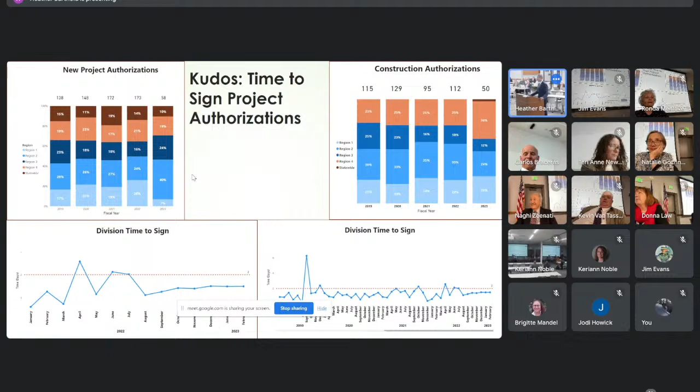That's all I have for you. Do you have any questions for me on anything? All right, yes, no — thank you.

Thank you. Other than — I think the 2-day thing is kind of remarkable, and the fact that we come in under that is extra remarkable. Yeah, it's great. I think it helps too that we do a lot of things electronically now. When I was doing this, it was all paper — we'd get a delivery from the state, a stack, and we had to go through it and get back to them. Electronic systems really do help expedite things. UDOT has given us access to all of this so we can get in, check what we need to do, and take action real quickly. That really makes a difference. Thank you.

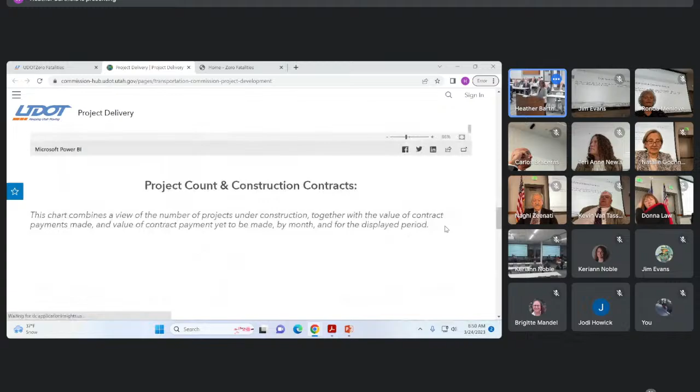Now looking at our construction contracts. Right now, in March, we have 170 projects in active construction. Contracts paid out are almost $1.2 billion in contracts paid, and you can see the remaining amount that we have on open contracts is about $600 million. Again, this is pretty typical for us at this time of year.

Moving down into the contractor payments, again, you can see the trends that we have. We were a little low in February, but I think everybody recognizes the challenges we've had with doing construction this winter, so it really aligns with where we're at, and it picked up a little bit. We'll continue to monitor that, but it's pretty standard for the way we do business.

Now moving on to the contract award and engineer's estimate. You can see the blue is the engineer's estimate, and the green is the original contract amount. We had asked everybody on project teams to go back and reevaluate their cost estimates because of inflation. We ended up estimating a little high because prices did start to come down, so we were actually getting really good bids, and you can see that with what we had in the green.

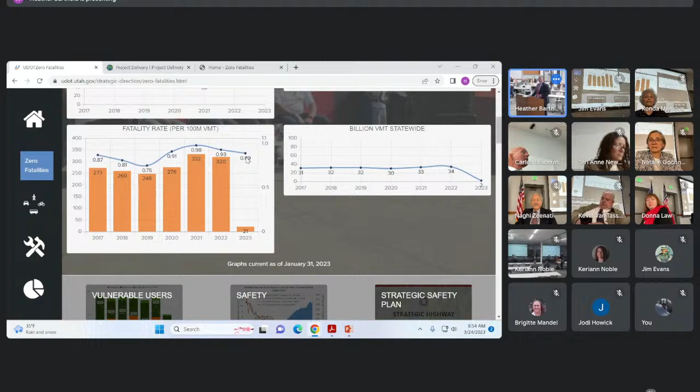Looking at a snapshot where we are today, we have had 51 fatalities this year. I talked about this target where we try to reduce based on a 2.5% reduction over the last 3 years, and right now we're trending below that, which is the first time I've been able to report that since I've been in this position. So keep our fingers crossed that that continues.

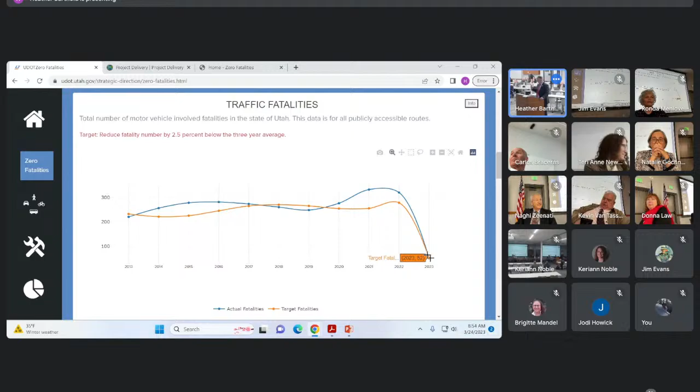Let me jump over here to the zero fatalities page and show you a little quick report card. If you looked at where we were last year at this time, we were at 63 fatalities, and as a comparison to today, we're at 51.

The other thing that was interesting is the number of crashes compared last year to this year. I'd attribute that a lot to the weather we've had, which we got to see this morning. So we do see more crashes of less than fatals, and I've attributed a lot to weather.

But I'd like to take a few minutes now and take some of this data that we received from 2022 and show you some of the information that we put together to analyze and look at.

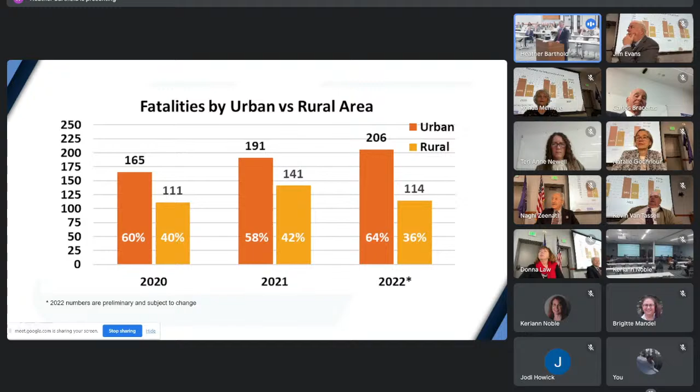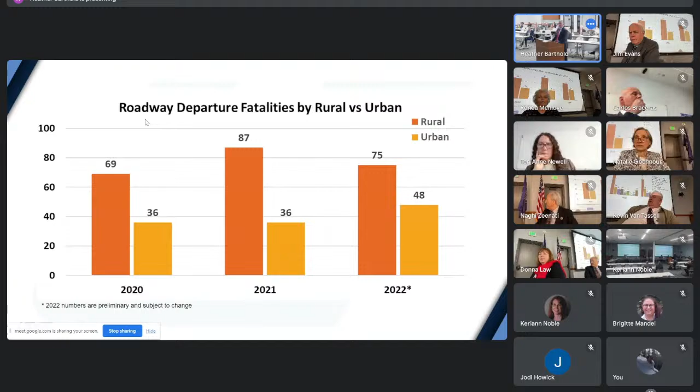We do a survey to determine how many Utahns are buckled up. Last year we were at 92%. If you look at the unrestrained and take out bicyclists, pedestrians, and motorcyclists, about 43% of the fatalities were unrestrained. That's 8% of our citizenry representing that high of a percentage.

Helping educate on wearing your seatbelts continues to be important. It seems obvious, we shouldn't have to talk about it, but we still have to. I do that in my own family, but I'll keep working on it.

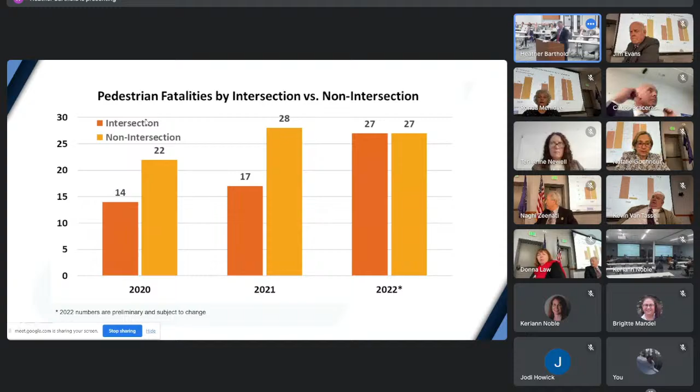Is that because at the non-intersection, this is people jaywalking, cutting across, or we have no access? How is that determined? That is jaywalking, and there's other distracted drivers not paying attention when they leave the roadway as well.

Remember, roadway departures is one of our items, so those two items play together. You couldn't put your finger and say it's just from jaywalkers, and it's not just because of lighting. There's a lot of issues when it comes to pedestrians getting hit.

This would also include if somebody broke down on the highway or interstate and got out of their car and got hit, it would be shown in this area. That is a concern, and that's one of the things we're working on, trying to find more solutions. We talked a little bit yesterday about HAWK signals or mid-block type crossings, so those are some things we're trying to work on installing more often when the criteria is met.

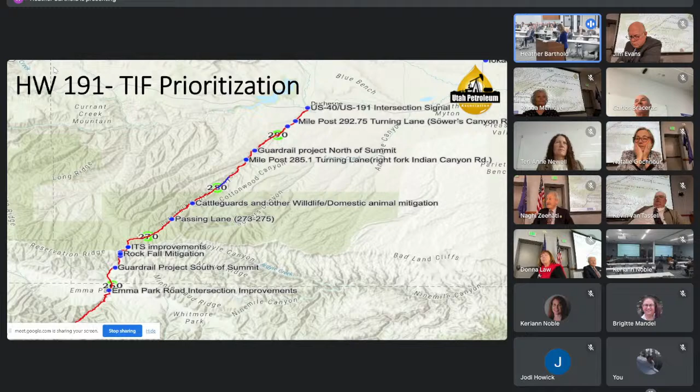I wanted to give a brief update on where we are with US 191, the traffic volumes and the needs out there. I had the opportunity to listen to a bit of your workshop yesterday, and some of the clarification around whether the 88.5 million was or was not funded. I will assure you that yes, as Leif explained, the legislature did provide the full 88.5 million requested, and it's not a coincidence that it exactly matches the UDOT study that supported it. We were very clear in articulating that in the funding request. So if we can move to the next slide.

Today we are exporting about 60,000 barrels a day, all via US 191 down to Price and Helper to the rail terminal. That's about 10,000 more barrels a day than the last time I had the opportunity to see you all, and that's actually ahead of our growth projection. So I wanted to give an update that we are continuing to grow, and we're expanding more rapidly than what we had put into that growth projection to you all.

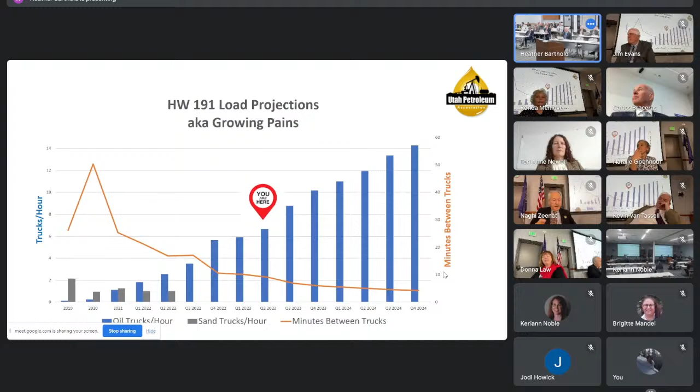I don't know if anyone else came in that wanted to make public comment. Those that came late in the UDOT family, Jim, let's start with you — introduce yourself for the record. For the record, Jim Evans, live in Utah County, Region 3. Great to be here today, sorry once again for my delay. You leave early and get here late. And those of the UDOT family who came late, just introduce yourselves. I'm Rob Clayton, Region 3 Director. Sorry for being late, I know where he was — same road I was on. Okay, go this way, another Region 3 guy, come on. Yeah, Matt Parker, Region 3 Program Manager. Arlington was a little rough. He came from Wasatch County. Go ahead. My name is Eric Dew, I'm the Bridge Program Manager. Becky Nix, the Bridge Management Engineer. Ty Bringer, Stokesville City. Anyone else? Mark Daniels, UDOT Structures Design Manager.

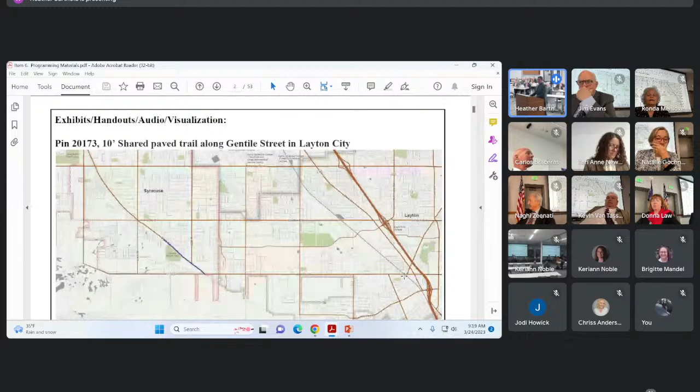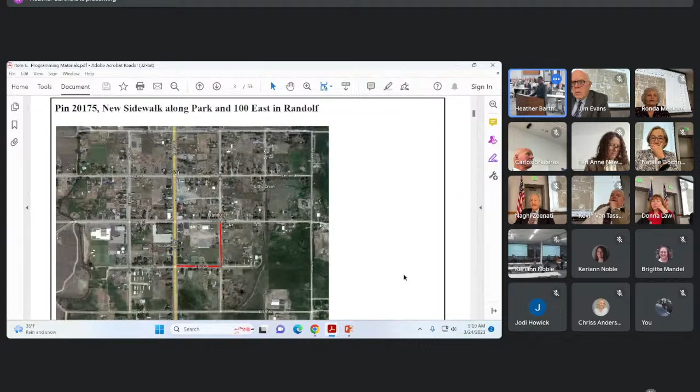Included in the item are the individual project maps. Project 20173 is a 10-foot shared paved trail along Gentile Street in Layton City. The second project is a new sidewalk along 500 South for Farmington Canyon Creek Elementary School. Project number 3 is a new sidewalk along Park and 100 East in Randolph. And project number 4 is a new sidewalk along Country Lane in Fruit Heights City, shown here on the map.

Our request today is a motion to approve adding these transportation alternative projects to the Region 1 Transportation Alternatives Program and to the current STIP as detailed. I'll make that motion. Thank you. I'll second. There's a motion and a second. Any other questions, comments? Seeing none, all in favor say aye. Aye. Any opposed? Item 6A-1 is approved. Thank you.

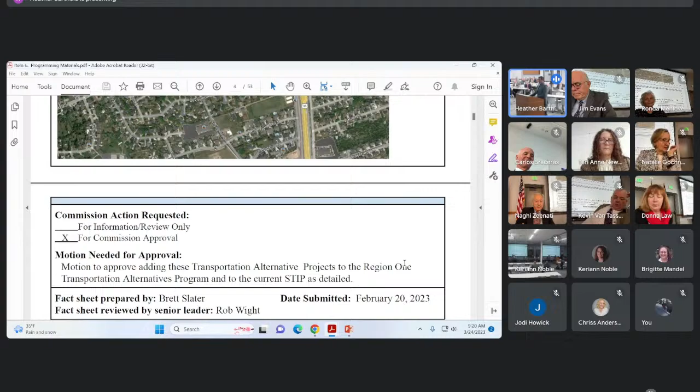Item 6A-2 is the Kays Creek Trail pedestrian overpass at Layton Front Runner. Layton City applied for 2 different program funds for the Kays Creek Trail, one through Wasatch Front Regional Council and one through the TIF Active project program. It was funded by both, but unfortunately the costs increased above what the application was. So rather than canceling one of the 2 projects, they'll be consolidating and using the TIF Active money to match the Congestion Mitigation Air Quality funds from Wasatch Front Regional Council.

There will also be some of the local match included, so this project will be consolidated. The funding adjustment will end with this bottom right-hand corner showing our proposed project value at the TIF Active, CMAQ, and local match for our project value.

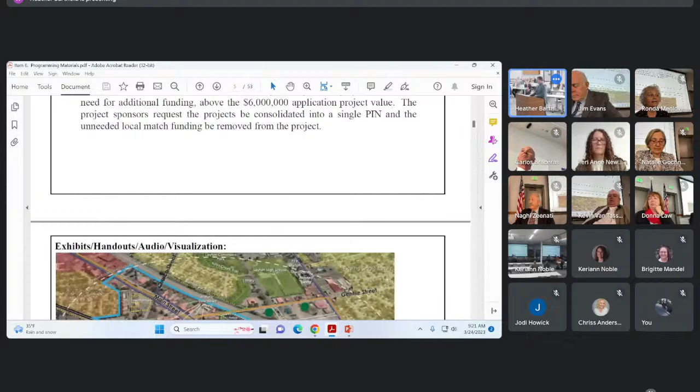In the justification, Layton City and Davis County submitted applications for the Kays Creek Trail pedestrian overpass at Layton Front Runner Station project to the Active Transportation Investment Fund program and Wasatch Front Regional Council's Congestion Mitigation Air Quality Improvement Program. They were successful with each application. In each program, the funding received from one grant can be used to satisfy the local match requirements of the other. After the funds have been awarded, further engineering on the project showed the need for additional funding above the 6 million application project value. Project sponsors request the project be consolidated to a single PIN and the unneeded local match funding be removed from the project. So it's located here on our map along the Front Runner Trail.

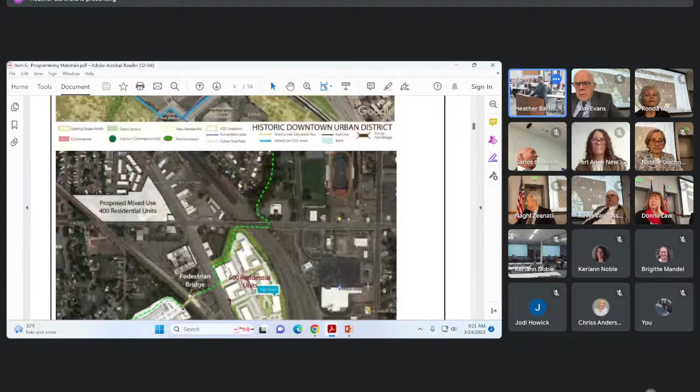Another map, and the pedestrian overpass.

Do we know the length of that overpass by chance? Phone a friend, we're up. I do not. Sorry. Okay.

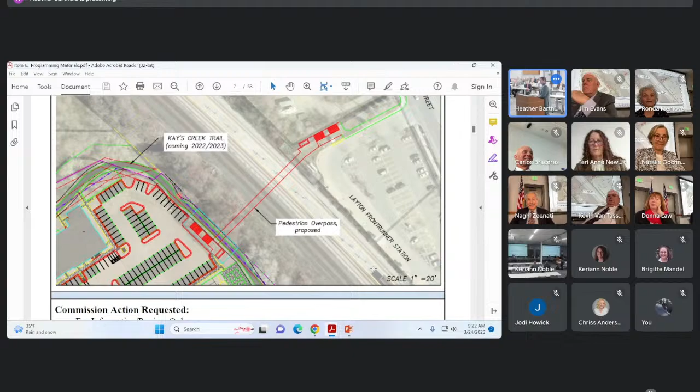A request today is a motion to consolidate the Kays Creek Trail pedestrian overpass and Layton Front Runner projects and to adjust funding as detailed. Motion made and seconded. Any other questions or comments? Seeing none, all in favor say aye. Any opposed? Item 6A-2 is approved.

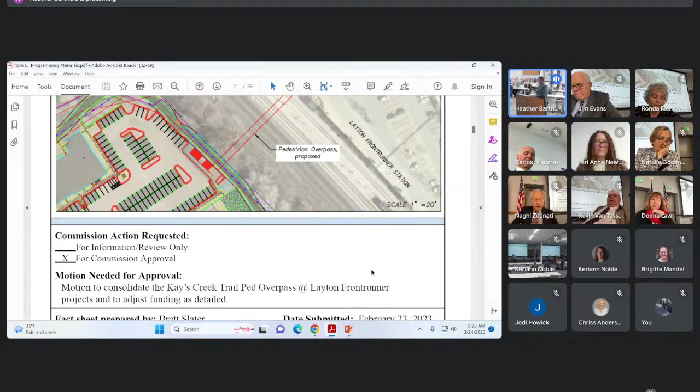6A-3, the SR 177 West Davis Highway, I-15 and SR 67 to SR 193, is a funding addition request from the Transportation Investment Fund. The additional funds are needed due to market-driven cost increases in right-of-way, materials like fuel and asphalt from supply chain interruptions, and utility delays. These increases exceeded the current contingency while the project is still under construction. A map of the West Davis Highway is shown here.

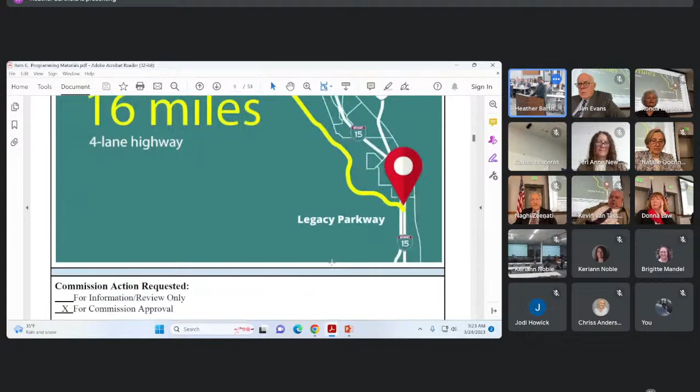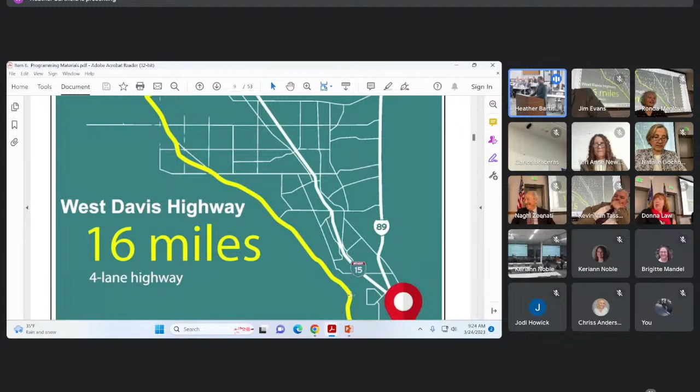Request today is a motion to add funding to the West Davis Highway project as detailed. Mr. Chair, I'll make that motion. Just to note, $50 million is a lot of money, but as a percentage it's 6%, which is less scary than some of the other increases we've seen. That helps me feel a little better about something with that many zeros.

Didn't the commission deobligate 50 million from this project? That's correct. When this project was awarded, we adjusted 50 million off the project about a year and a half to two years ago and put that money to work elsewhere, not expecting the cost increases we've seen since. So we're putting nearly that same money back. That's an excellent reminder, how do you track that? We have amazing people, folks like Rex and Randy who live this project day to day.

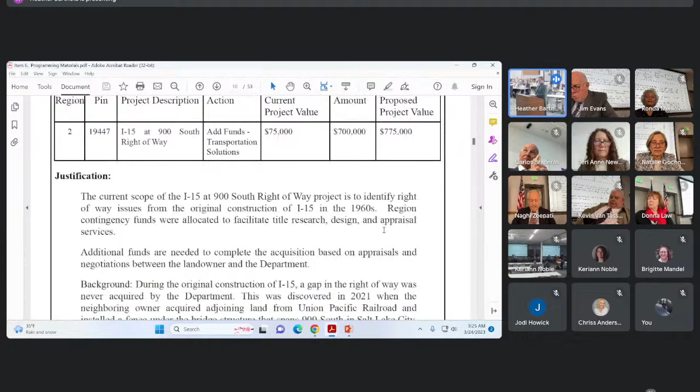6A-4 is the I-15 at 900 South right-of-way project, a funding addition from Transportation Solutions. The current scope is to identify right-of-way issues from the original construction of I-15 in the 1960s. Region contingency funds were allocated for title research, design, and appraisal services. Additional funds are needed to complete the acquisition based on appraisals and negotiations between the landowner and the department. During original construction, a gap in the right-of-way was never acquired. This was discovered in 2021 when the neighboring owner acquired adjoining land from Union Pacific Railroad and installed a fence under the bridge spanning 900 South in Salt Lake City, blocking UDOT's ability to conduct inspections and maintenance.

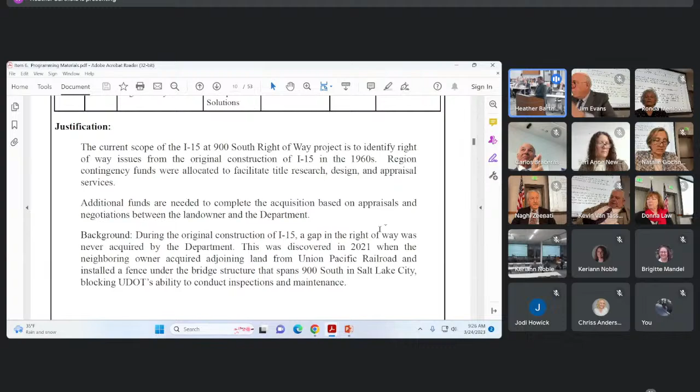Shown here on our map. The request today is a motion to approve adding funds to the I-15 at 900 South right-of-way project as detailed. Mr. Chair, I'll make this motion. Thank you. Our agenda today is so disparate, but I thought this was a very interesting item, having to do title research back to construction done in the sixties. I'd second that.

But is the owner of the property in compliance and free to sell? Charles? Come on, Charles, come on. He doesn't have an item on the agenda, so I'm glad I get to share mine with him.

So the owner of this property, is he willing to sell? Are you negotiating? We have reached a tentative agreement on price. We're working on a lease back, and I'm going to have some conversations with our structures team about the scope of the lease back and what can be conducted under the structure that exists there. So there's a little bit of work left to do, but we have the contours of an agreement in place.

Thank you, Charles. Introduce yourself. Charles Stormont, Director of Right of Way and Property Management. Thank you, Charles.

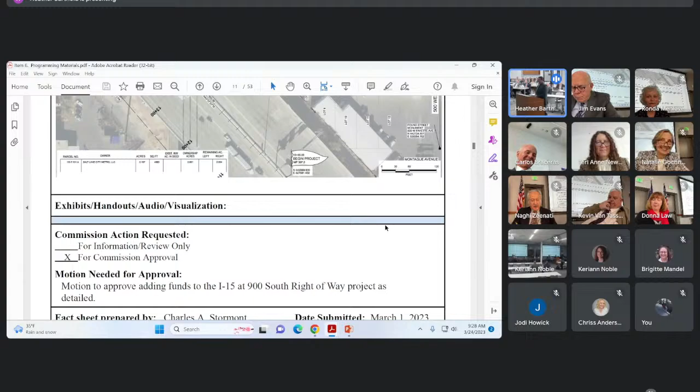We have a motion and a second. Any other questions? Go ahead. No question, I was just going to compliment Charles for his always-at-the-ready, thorough understanding of everything. So true, that's my discussion. Thank you. All in favor say aye. Any opposed? Item 6A-4 is approved.

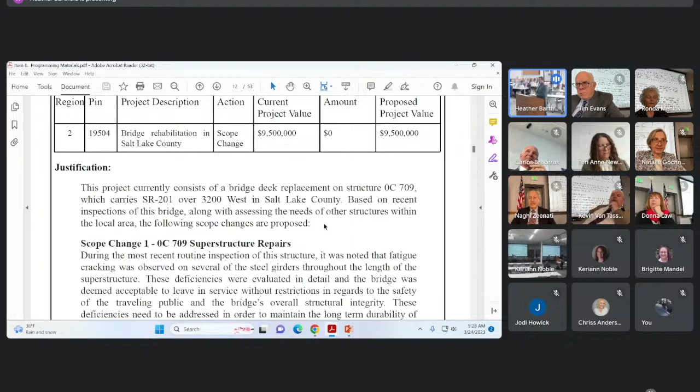6A-5 is a scope change to the SR 201 over 3200 West Bridge Deck Replacement project, involving bridge rehabilitation in Salt Lake County. This project currently consists of a bridge deck replacement on structure 0C709, which carries SR 201 over 3200 West. Based on recent inspections of this bridge, along with assessing the needs of other structures in the local area, scope changes are proposed. During the most recent routine inspection of structure 0C709, fatigue cracking was observed on several of the steel girders throughout the length of the superstructure.

These deficiencies were evaluated in detail, and the bridge was deemed acceptable to leave in service without restrictions regarding the safety of the traveling public and the bridge's overall structural integrity. These deficiencies need to be addressed to maintain the long-term durability of the structure. This scope change will allow for a holistic rehabilitation of this bridge.

Scope change number 2 is the addition of 0C669 to the project. Built in 1980, this structure carries 5600 West over I-80 in Salt Lake County, Region 2. This structure has been a vital part of the infrastructure network in the area, with an AADT of 19,000, approximately a third of that being truck traffic. Recent inspection reports and maintenance findings have shown significant deterioration of the concrete bridge deck, as well as degradation of the existing polyester concrete overlay.

These issues have caused a decrease in rideability and pose a notable threat to the overall service life and durability of the structure. The bridge dropped to poor condition during the 2022 in-service inspection. It has been determined that the bridge deck has reached the end of its service life and a deck replacement is warranted. In addition, Region 2 has expressed interest in widening this bridge to either bring the existing DDI geometry up to standard or return the interchange to its original configuration. Based on the similarities in scope and proximity, it is proposed that this bridge be added to the project to take advantage of potential design and construction efficiencies.

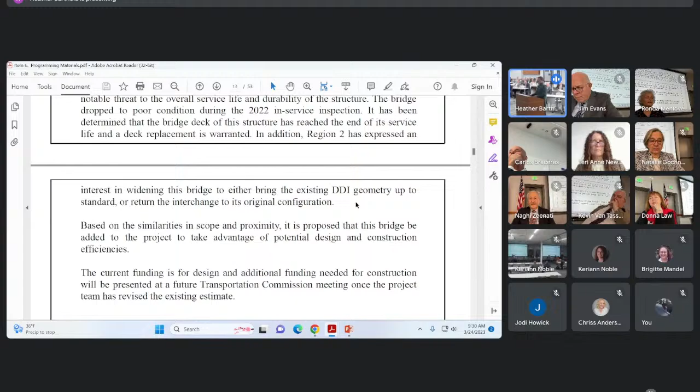The current funding is for design, and additional funding needed for construction will be presented at a future Transportation Commission meeting once the project team has revised the existing estimate.

Mr. Chairman. Yes. These two bridges were fairly close to the epicenter of the earthquake we had a couple of 3-4 years ago. Did they suffer any damage, or is that reflected in any of this work we're doing? Becky, do you want to answer that, or?

Good morning, Becky Hjelm, Chief Structural Engineer. No, these ones, we didn't have to do any repairs for that. We'll just be doing upgraded maintenance to maintain them for the next 50 years. That's right.

Thank you, Becky. What is the shelf life of the polyester overlay? So polyester, we're expecting about 25 years. The problem on this bridge is it's the underlying concrete that's degraded, and that's causing it to fail. Thank you.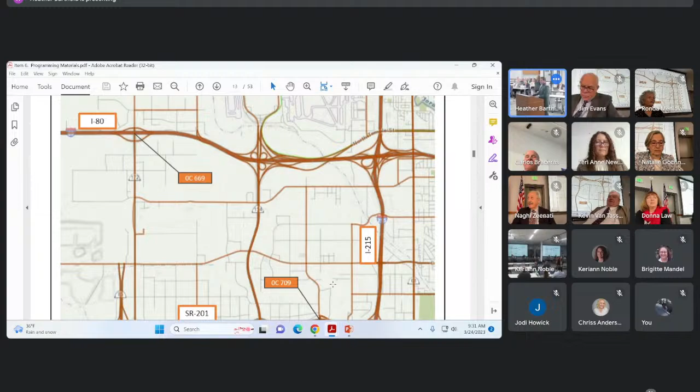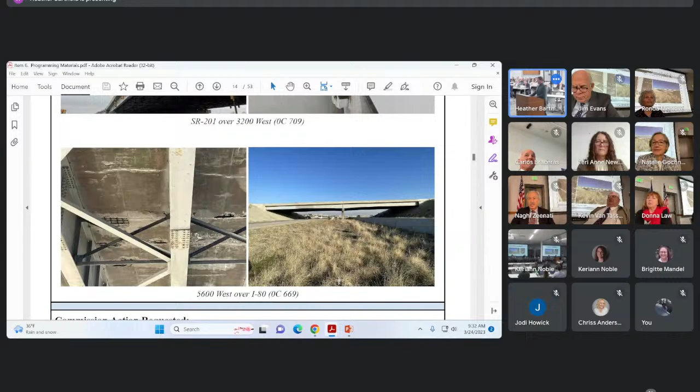Do you have pictures of the two structures? First one, over 201. And 5600 West over I-80. I think this is the picture that shows that underlying concrete.

Our request today is a motion to approve the scope change of the SR 201 over 3200 West Bridge Deck Replacement Project as detailed. So moved. And I'll second it, and this is an easy one. Thank you, after seeing those pictures. Thank you, Eric, for providing such a detailed explanation. Thank you, makes a big difference for the commission.

So we have a motion and a second. Any other questions or comments, even though it was the easy one? All in favor, say aye. Aye. Aye. Any opposed? Item 6A-5 is approved.

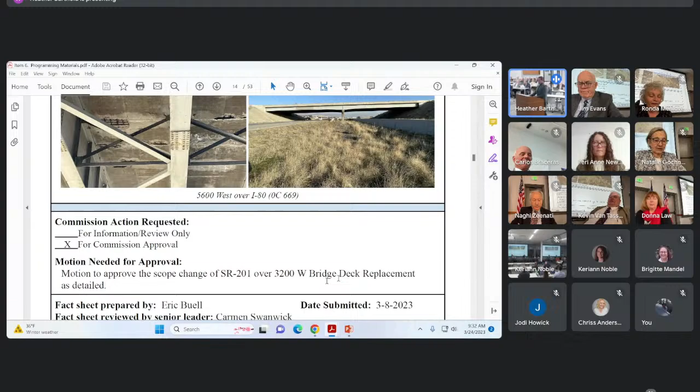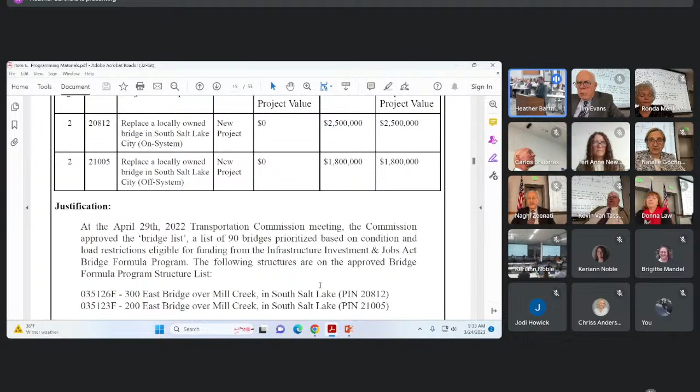Thank you. 6A6, Bridge Formula Program Project Additions. We have two projects being proposed to be added to this program. At the April 29, 2022 Transportation Commission meeting, the commission approved the bridge list, a list of 90 bridges prioritized based on condition and load restrictions, eligible for funding from the Infrastructure Investment and Jobs Act Bridge Formula Program.

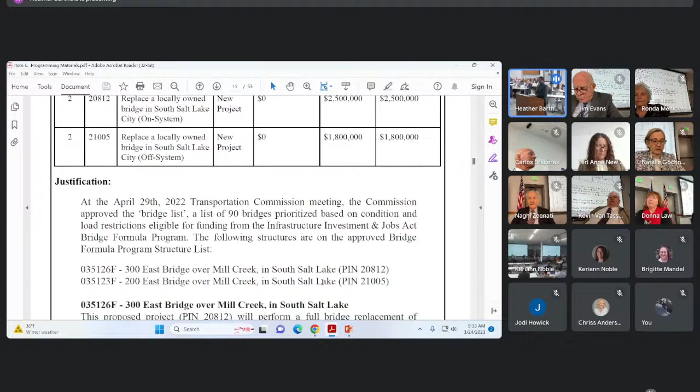The following structures are on that approved Bridge Formula Program structure list: the 300 East Bridge over Mill Creek in South Salt Lake, and the 200 East Bridge over Mill Creek in South Salt Lake. The first one, 300 East Bridge over Mill Creek: this proposed PIN will perform a full bridge replacement of this structure. The existing structure is currently in poor condition and is load posted to 19 tons. This structure is also on the federal aid highway system, therefore the project will require a local agency match under the Bridge Formula Program. South Salt Lake City is in support of the project and is able to provide the necessary match.

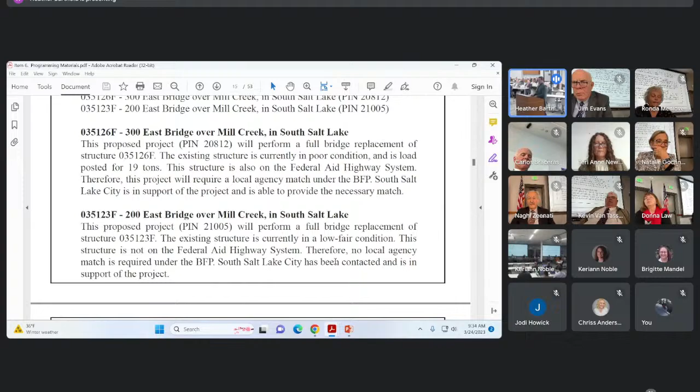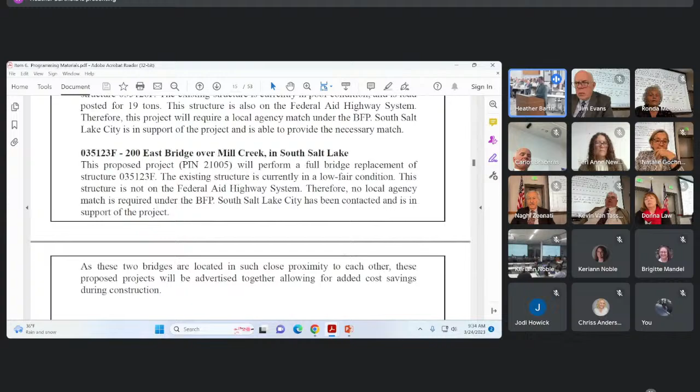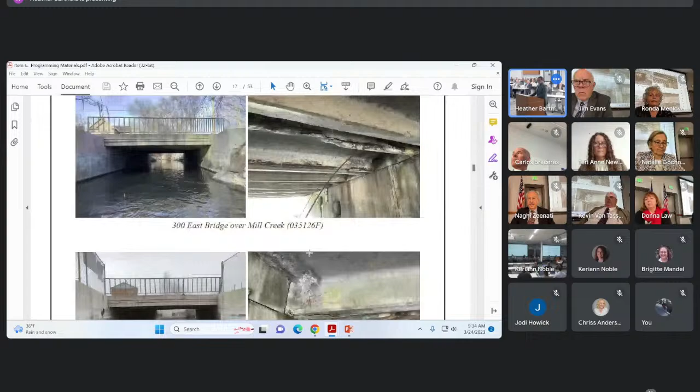Our request today is a motion to approve the Bridge Formula Program project additions as detailed. Mr. Chair, I'll make that motion. I'll second it. There's a motion and a second on these two bridges. Any questions or comments? Seeing none, all in favor say aye. Aye. Any opposed? Item 6A-6 is approved.

Thank you. Moving into Region 3, the Provo River Parkway Trail. The project is ready to advertise for construction. During the design and constructability review, it was determined that the cost of construction has increased in the last year. The largest factor is general inflation impacting the cost of retaining walls, railroad tracks, and structural steel, so it's a TIF active request.

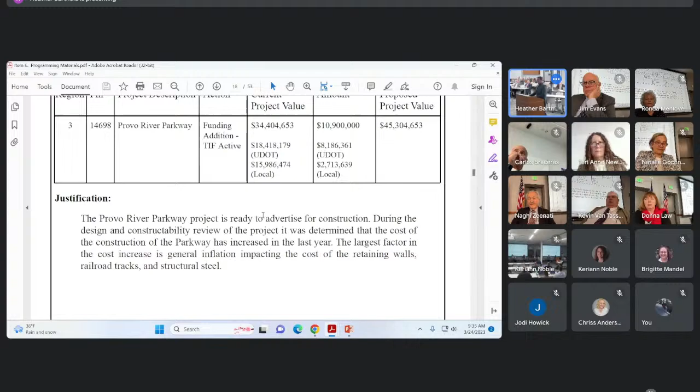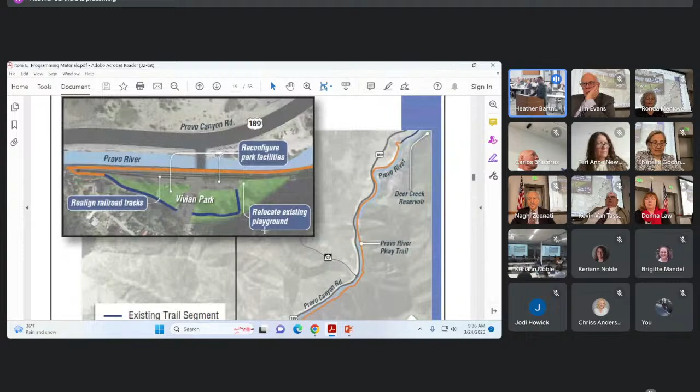Located here on our map in Provo Canyon, zooming in along the Provo River at Vivian Park. Some pictures showing the existing trail location, and examples of the retaining walls and the constructability of the project.

There is a map in here. Unfortunately our screen isn't a great way to display this, but I love this map because it shows the connection down here at the very bottom. Here's our Provo River Parkway Trail in the segment we're talking about. And if you look at the entire loop of this trail, it goes all the way up, meets up along the Weber River, connects to the Bonneville Shoreline Trail, and comes back. The interesting fact on the sheet I read, which must be true because it's here, is that it encompasses 78% of the population of the state along this connecting trail.

We've been working on this segment for 20 plus years. As I talked about before, not only does completing this help, but it gets people off of Provo Canyon, because right now there's a segment with no trail, just a river, and you can't even do it. So if you want to complete that loop, you have to go over on the highway with vehicles and get back off. I think we need this for a safety factor, plus it supports the Trails Initiative and everything else, so I move for approval. I know it's a lot of money because of the retaining wall and steel, but we need to get this done.

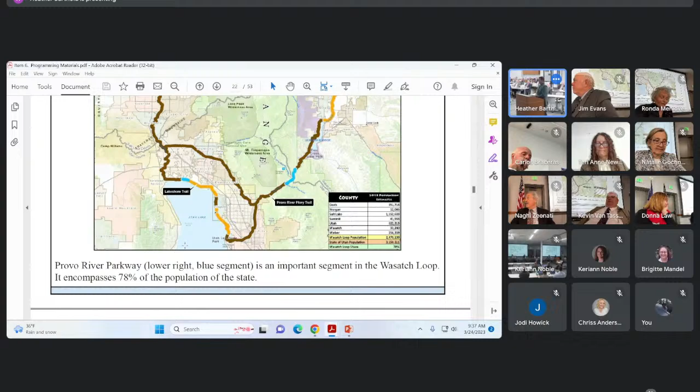There's a motion and second. Heather, Donna did the second. Okay, any other questions or comments?

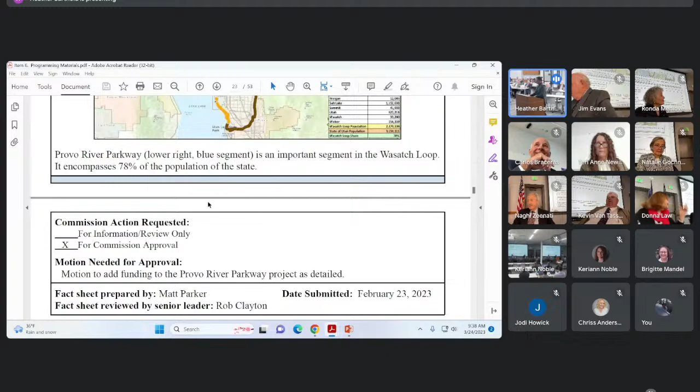Can you just explain the train track part of this to me? We've probably discussed this before and I'm sorry, I just can't remember. The train track part, that's part of the Heber Creeper Railroad. The department owns that infrastructure, but we don't operate the train. Someone on the commission might remember they gave the commission a ride years ago. I think Naghi, chairman, was probably with us. When this gets done, we get to go on another ride maybe. But yeah, the tracks are there, and that's part of putting the wall in and having to kind of move it around a little bit so the trail can fit in. The tracks are still there and everything. Thank you for that explanation.

This will be one of the most used trails they've had. I agree.

Right, Mr. Price, Mr. Bicycle from Mountain Land. Jim, is there anything you want to say? Do you have any comments? You want to come up and say something? Come up to the podium, give your name. So you drove through the snow to get here, you got to get up and say something. Did you bike or did you ride? Thank you, Commissioner Evans. It would have been faster if I'd walked.

Introduce yourself, please. Oh, I'm sorry. My name is Jim Price. I'm with Mountain Land Association of Governments, and we've been working on this particular part of the Wasatch Loop for, I'm going on 23 years.

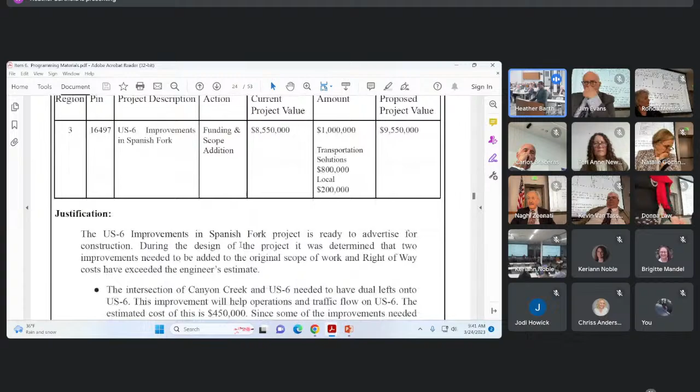6A-8, the US 6 improvements in Spanish Fork, is a funding and scope addition with our Transportation Solutions Fund as well as some local contribution. The US 6 improvements in Spanish Fork project is ready to advertise for construction. During the design of the project, it was determined that 2 improvements needed to be added to the original scope of work, and right-of-way costs have exceeded the engineer's estimate.

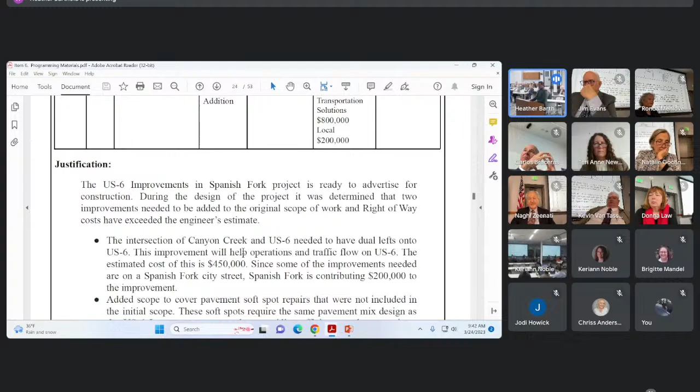The intersection of Canyon Creek and US 6 needed dual lefts onto US 6. This improvement will help operations and traffic flow on US 6. The estimated cost for this is $450,000.

Some of the improvements needed are on the Spanish Fork City Street. Spanish Fork is contributing $200,000 for that improvement. The second added scope is to cover pavement soft spot repairs that were not included in the initial scope. These soft spots require the same pavement mix design as the US 6 improvement uses, thus providing efficiency and cost savings. The estimate for this scope increase is $100,000.

Our right-of-way costs have exceeded the engineer's estimates, and the project does not have the funding available but continues to meet the need. The requested increase of the right-of-way item is $450,000.

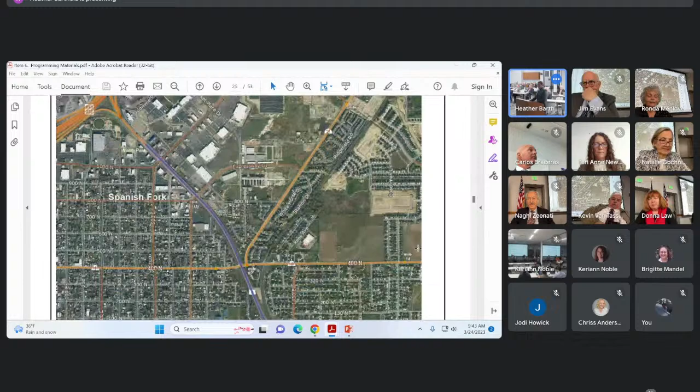Located here on our map, Spanish Fork.

Our request today is a motion to add funding to the US 6 improvements in Spanish Fork project as detailed. Again, compliment to Matt for introducing such a beautiful and detailed itemized cost of the project. Thank you. I move for approval.

Thank you, second. There's a motion and a second. Any other questions? Comments? Yes, please.

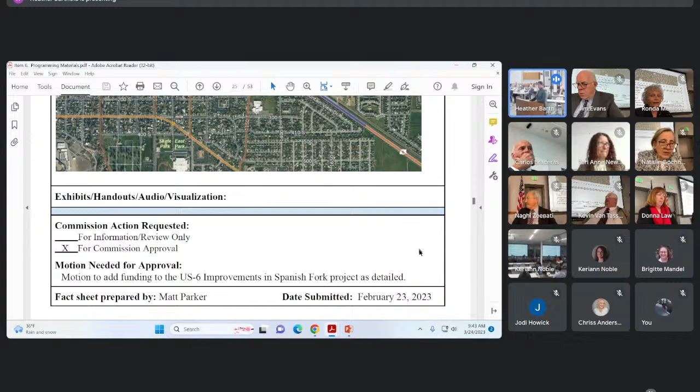Quick question: those first two improvements, the dual left turns and the soft pavement repairs, would those be considered in any way safety or repair adjustments, or are they mostly just for the through traffic usage of the road?

I'm Matt Parker, Region 3 Program Manager. Yes, so what the dual lefts are doing is we're getting a lot of backing into the travel lane, so it allows the turning vehicles to get out of the travel lane and provide more storage. But also, the city is providing money in the project to provide receiving for those two lanes.

So that's safe, yeah, it's to prevent back up. And the soft spots? Yeah, so we have another pavement project further up the road, but there are some soft spots.

What is a soft spot? The soft spots are where the asphalt is deteriorated, or something's happening deeper in the asphalt. So we have to go in and mill it out and put in new pavement. That is a different mix design than what was in the pavement project adjacent to this, so it makes more sense to put it in this project since we already have a similar type of work going on.

Do soft spots become potholes? Yes, so it's pretty much the job. When we think about preservation, the type of work we normally do is top down. This is a failure either deeper in the pavement or even in the pavement structure, it could be down to the subgrade, so you have to work bottom up, and it's a different mix design.

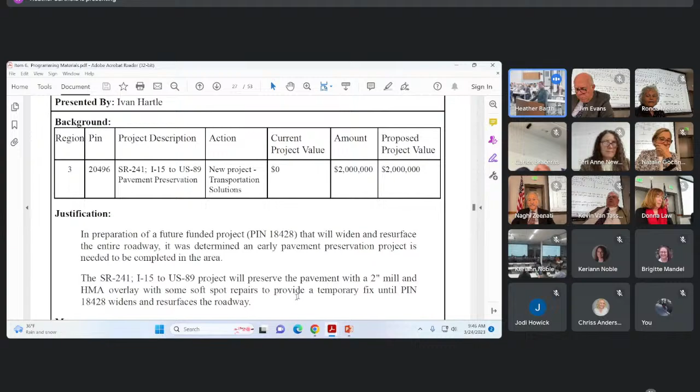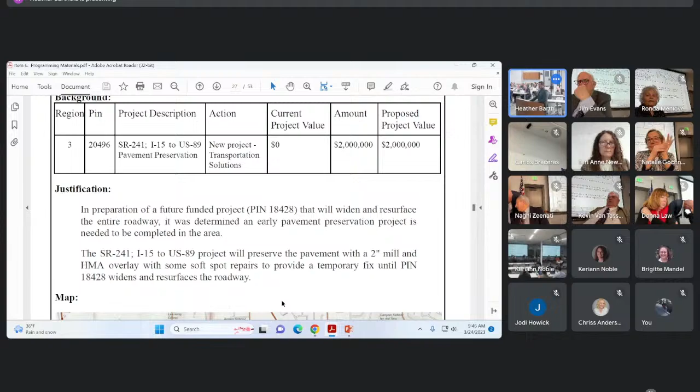6A-9 is the SR 241 I-15 to US 89 pavement preservation project. This is a new project out of our Transportation Solutions program in Region 3 for $2 million. In preparation of a future funded project, PIN 18428, that will widen and resurface the entire roadway, it was determined that an early pavement preservation project was needed in the area. This project will preserve the pavement with a 2-inch mill and HMA overlay with some soft spot repairs to provide a temporary fix until PIN 18428 widens and resurfaces the roadway. Located here on our map.

Request today is a motion to approve adding the SR 241 I-15 to US 89 pavement preservation project to the current STIP as detailed. So moved. I'll second. So motion and second, item number 9. Any questions, comments, concerns? Seeing none, all in favor say aye. Aye. Any opposed? Item 6A-9 is approved. Thank you.

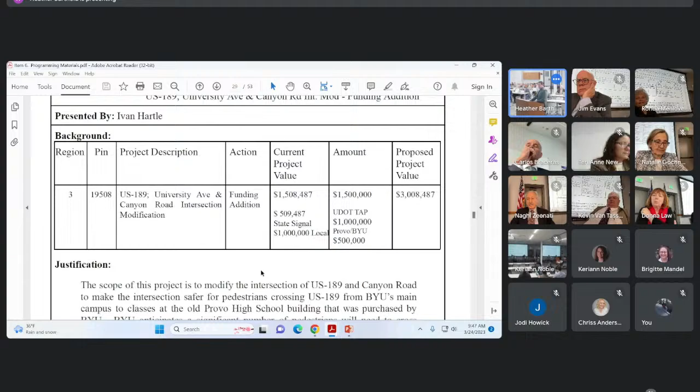Item 6A-10 is the US 189 University Avenue and Canyon Road intersection modification project. It's an increase of both state and local match funds. The scope of this project is to modify the intersection on US 189 and Canyon Road to make the intersection safer for pedestrian crossing, from BYU's main campus to classes on the old Provo High School building that was purchased by BYU. BYU anticipates a significant number of pedestrians will need to cross US 189. During design, it was determined that some right-of-way impacts identified as unimpacted previously could not be avoided. In addition, the cost of construction has increased from the initial concept estimate. The main items of escalation are concrete, labor, and an underestimated amount of sidewalk needed on Canyon Road.

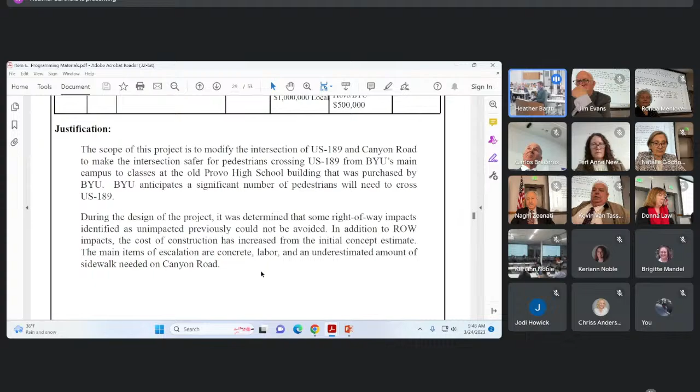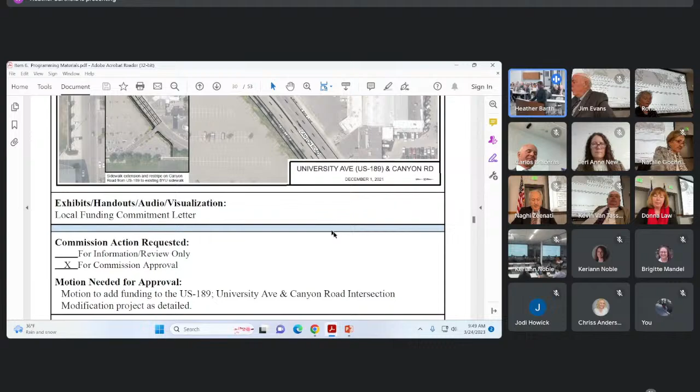Located here at the intersection of 189, University Avenue, and Canyon Road. Our request today is a motion to add funding to the US 189 University Avenue and Canyon Road intersection modification project as detailed. I move for approval and I'm grateful that BYU is putting some money into the project. I'll second, but can you remind me what TAP is? The Transportation Alternative Program. Thank you. Any other questions? Seeing none, all in favor say aye. Aye. Any opposed? Item 6A-10 is approved. Thank you.

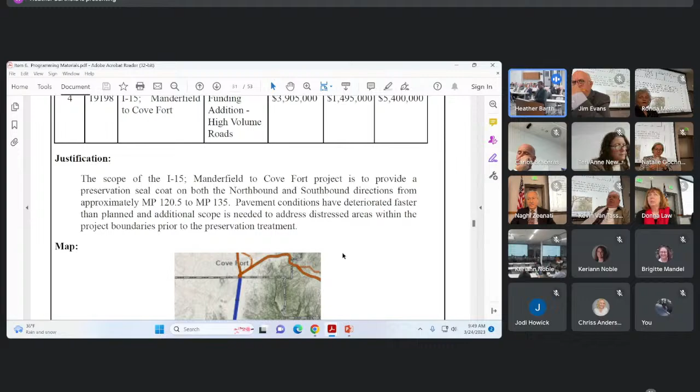6A-11, moving into Region 4, I-15 Manderfield to Cove Fort. This project is currently funded. It's a high-volume road request addition. The scope is to provide a preservation seal coat in both the northbound and southbound directions from approximately milepost 120 to 135. Pavement conditions have deteriorated faster than planned, and additional scope is needed to address distressed areas within the project boundaries prior to the preservation treatment. Located here on our map.

Our request today is a motion to approve adding funds to the I-15 Manderfield to Cove Fort project as detailed. I'd like to make this motion. I've noticed as I've driven recently, particularly at the seams - did I say that right, Monty? So yeah, I want to make that motion. Thank you, I'll second it. There's a motion and a second. Any other questions, comments? Seeing none, all in favor say aye. Aye. Any opposed? Item 6A-11 is approved. Thank you.

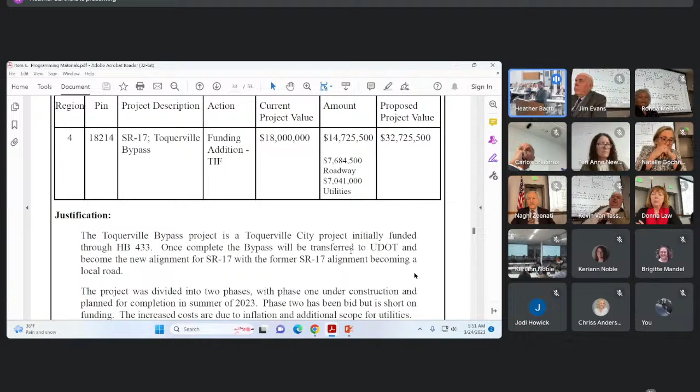6A-12, SR 17 Toquerville bypass. That's a funding addition from the Transportation Investment Fund. As discussed yesterday in the workshop, a portion of this was legislatively directed. The utility section and the request of the 7.7 million is the increase needed for the roadway portions. The Toquerville bypass project is a Toquerville City project initially funded through House Bill 433. Once completed, the bypass will be transferred to UDOT and become a new alignment for SR 17, with the former SR 17 alignment becoming a local road.

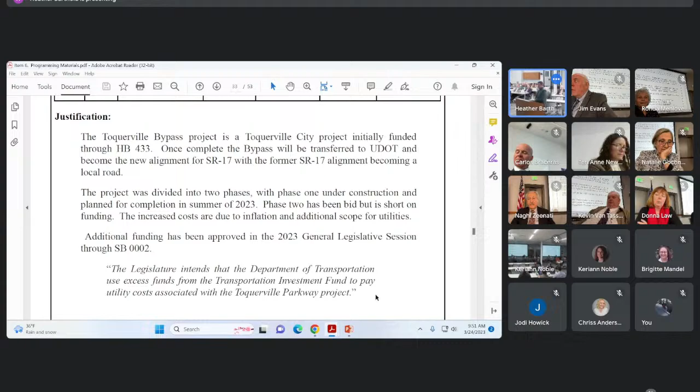The project was divided into two phases. Phase one is under construction and planned for completion in summer of 2023. Phase two has been bid but is short on funding. The increased costs are due to inflation and additional scopes for utilities. Additional funding has been approved in the 2023 general legislative session through Senate Bill 2, which reads that the legislature intends the Department of Transportation use excess funds from the Transportation Investment Fund to pay utility costs associated with the Toquerville Parkway project.

A request today is a motion to approve additional funding to the SR 17 Toquerville bypass project as detailed. Mr. Chair, I'll make the motion. I know a lot of work has been done to find this solution, and Commissioner Law and I were there at the groundbreaking of this project. I'm happy to second it, and just in the discussion, remind us when this will be completed - I don't mean this phase, but the whole bypass. Full bypass.

Good morning, Monty Aldridge, Region 4 Director. We anticipate that they'd complete construction on this phase during this summer, this construction season.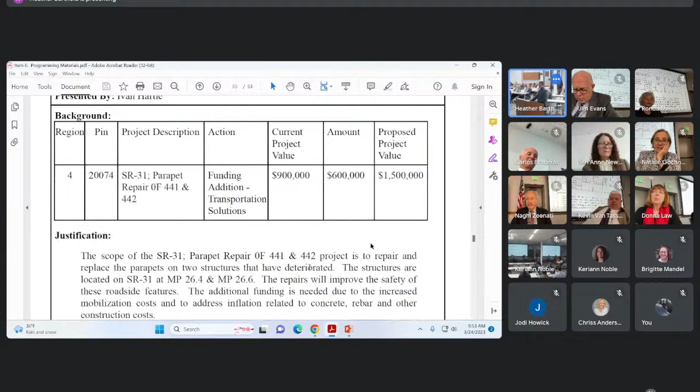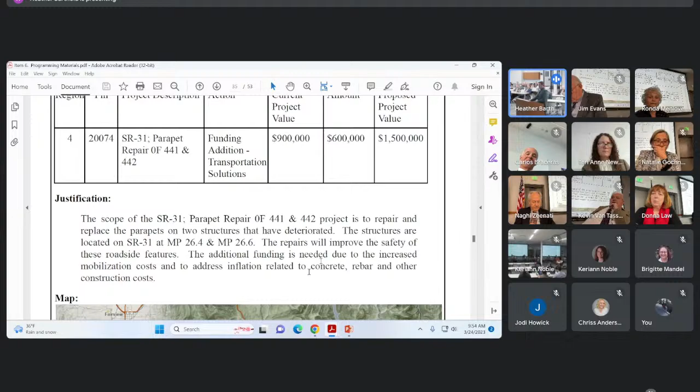6A-13, also in Region 4, parapet repair, the funding addition from our Transportation Solutions Program. The scope of the SR 31 parapet repair 0F441 and 442 project is to repair and replace the parapets on two structures that have deteriorated. The structures are located on SR 31 at mileposts 26.4 and 26.6. The repairs will improve the safety of these roadside features. The additional funding is needed due to increased mobilization costs and to address inflation related to concrete, rebar, and other construction related costs. Located here on our map.

Pictures. Our request today is a motion to approve additional funding to the SR 31 parapet repair 0F441 and 442 project as detailed.

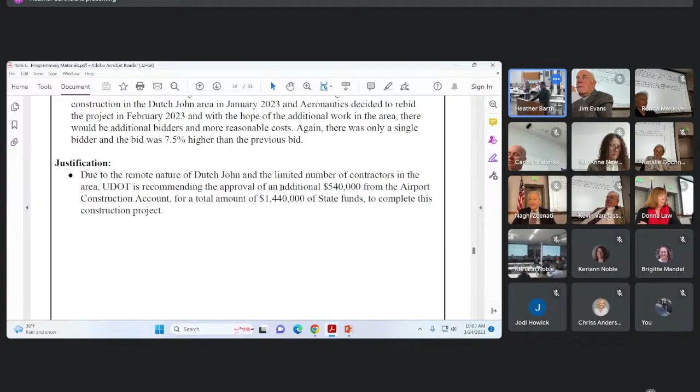Included in the packet of materials is an overview of the Dutch John Airport, its location in Flaming Gorge. Our request today is a motion to approve adding funds to the Dutch John Airport project as detailed.

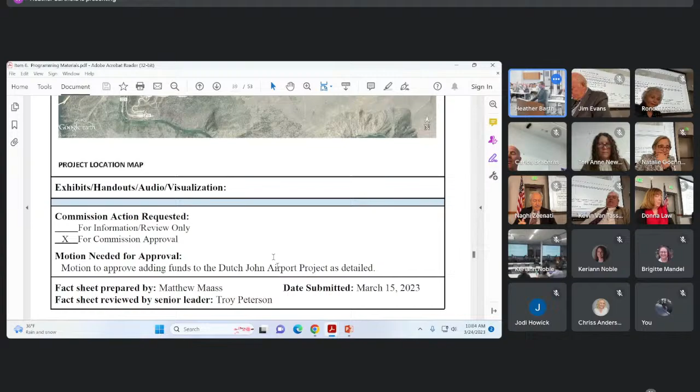I make that motion, Mr. Chairman. I'll second. We have a motion and a second. Any other questions or concerns? Seeing none, all in favor say aye. Aye. Any opposed? I'll oppose this one, mostly because I don't understand the subsidy well enough. Item 6A-14 is approved with one opposing vote.

Item 6A-15 is the US 189 Emergency Rockfall Mitigation, MP 7.6, located in Region 3. On March 10th, 2023, a portion of the rock face next to the ramp from eastbound SR 52 to northbound US 189 fell. The portion of rock that fell left a large section of material that has been undermined and is at risk of falling on the roadway, closing the ramp.

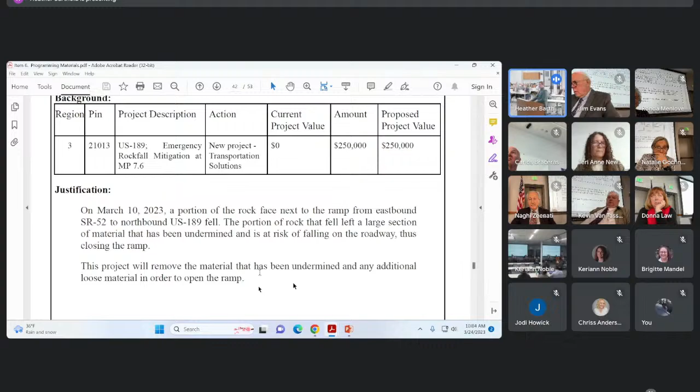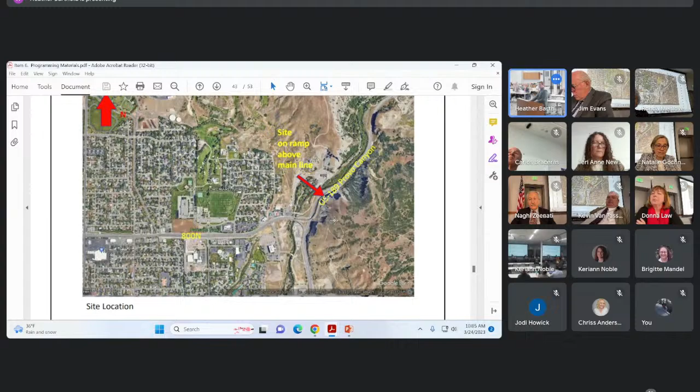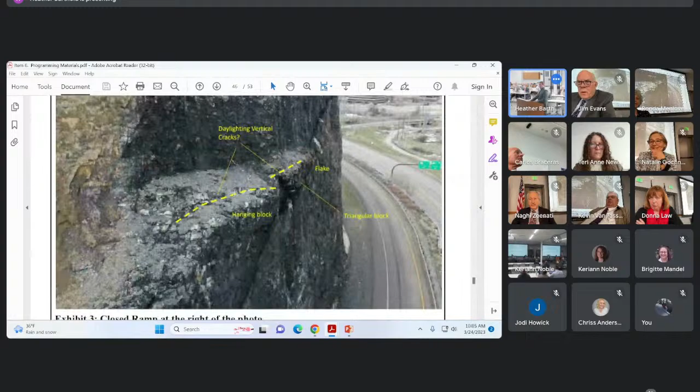This project will remove the material that has been undermined, along with any additional loose material, in order to open the ramp. Located here on our map is the site of the rock fall, at the mouth of the canyon, closing this ramp onto US 189. We have some pictures of what the rock face looks like before and after. You can see the section highlighted in red has fallen, and the hanging rock visible now on the rock face, shown here, and how close that is to the ramp. Last picture.

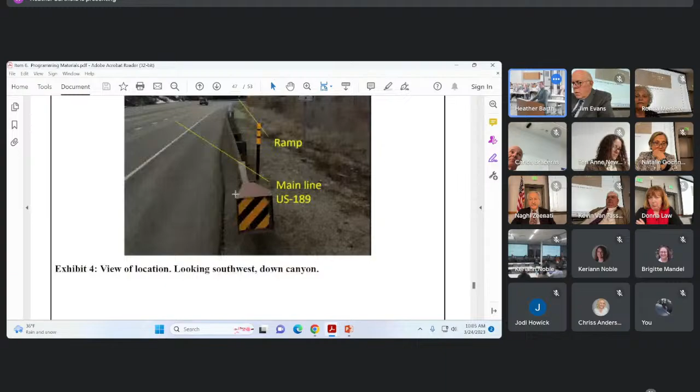Included is the procurement form that was used, as this project was approved at $250,000. This is information only. This project was approved by the Deputy Director's authority given in the Utah Transportation Commission Policy 01-01.

Thank you, Lisa. The sooner the better, because you can imagine people having to go towards Provo, and then they're supposed to go down another road, but they're all flipping U-turns right there on the highway going towards the canyon, which is pretty dangerous. So I'm glad we're getting this fixed so we can open that overpass again. They put lights and cones there, but people don't care. I've been behind cars coming north, so it's really not a safe situation even trying to divert traffic around right now. I'm glad you guys are getting it fixed.

Next item, 6A-16, Mountain View Corridor from 2100 North to Porter Rockwell. This is a scope and funding transfer between two previously approved commission projects. As part of the current funded project, 12413, the Mountain View Corridor 2100 North to Porter Rockwell, the freeway portion of the roadway from 2100 North to Porter Rockwell Boulevard will be constructed. This will complete the connection to the other sections of Mountain View Corridor in Salt Lake and Utah County. This project will help reduce congestion on Redwood Road and I-15 around the point of the mountain by providing an alternative freeway connection for traffic traveling between Northwest Utah County and Salt Lake County.

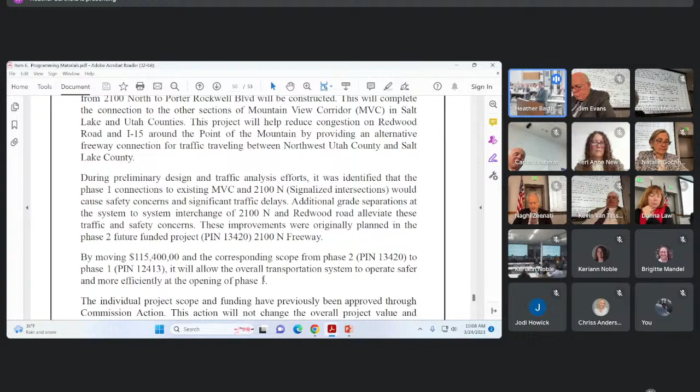During preliminary design and traffic analysis efforts, it was identified that phase 1 connections to the existing Mountain View Corridor at 2100 North, the signalized intersections, would cause safety concerns and significant traffic delays. Additional grade separations at the system interchange on 2100 North and Redwood Road alleviate these traffic and safety concerns. These improvements were originally planned in the phase 2 future funded project, 13420, 2100 North Freeway. By moving $115,400,000 of the corresponding scope from phase 2 to phase 1, it will allow the overall transportation system to operate safer and more efficiently at the opening of phase 1.

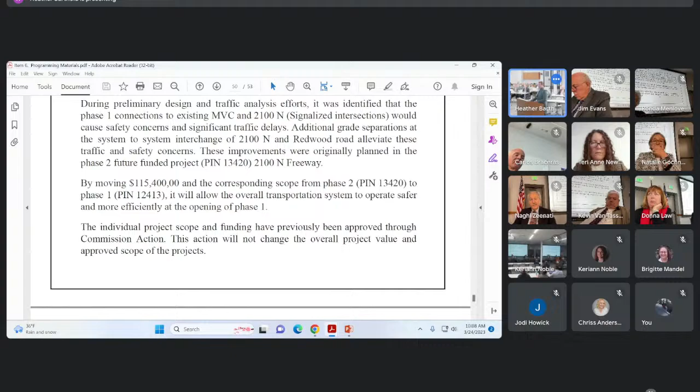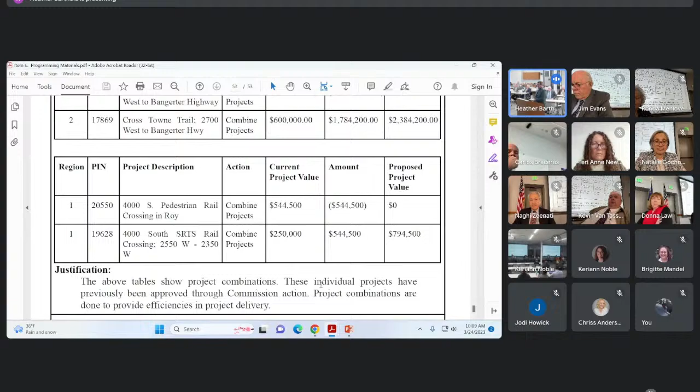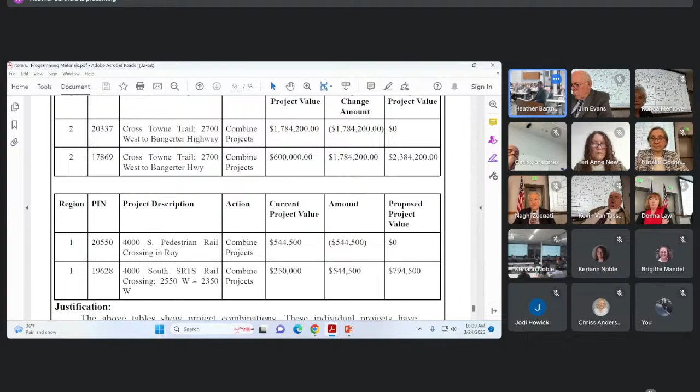Item 6A-17, we have two project combinations. Both project tables show these combinations. The individual projects have previously been approved through commission action. Project combinations are done to provide efficiencies in project delivery. The first is the Cross Towne Trail, 2700 West to Bangerter Highway, and the 4000 South pedestrian rail crossing projects. Again, these have already been approved through action and are for information only. Are there any questions?

So people want Monty's findings now. Mr. Chairman, I think it might be good to ask Monty to come forward.

We received a call from Commissioner Pollack. Some of the commissioners may remember we had a landslide on what's referred to as the dump road years ago. Region 4 did a great job fixing that project, but it's right near the National Park there. I got a call that the road's moving again, and Monty's folks have been going out there. We're probably not ready to say what's going on right now, but Monty, if you could share that, I anticipate we'll be back to the commission.

Yes, again, Monty Aldridge, Region 4 Director.

As Carlos mentioned on SR 12, in a location we call the Dump Road, we had a slide, and we had a project that completed last year to address that we had funded. With the wet season, we're seeing some more movement today. We're not certain what is causing it. We started taking measurements.

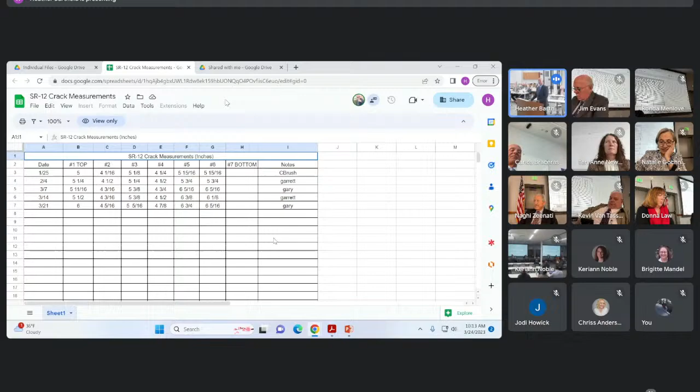Well, good luck to you and your team. Thank you. Any other questions with regard to that? Thank you very much.

Well, that concludes our agenda items. Now we go to agenda item number 7, which is information. The next commission meeting is going to be on May 4th and 5th in this UDOT complex.

We're not going to go through the full commission report, so I will start from my left this time. Commissioner Van Tassell, nothing to report. Nothing new to report.

I don't have anything relative to my assignments, but I do want to commend the UDOT group in Region 4. Cedar City's working on a solutions development program, and we've got some great people involved, Jared in particular, who attends all of those meetings and provides insight. I just want to commend the team, Monty, for the attention that Cedar City's getting to help solve some of our transportation issues. Thank you.

Nothing for me, not either. I just want to report the Cache Metropolitan Planning Organization is doing a study, working with Region 1, on Western arterials in Cache Valley. As many of you know, there are complexities with Logan Main Street and transportation through Cache Valley, and there's also a separate study going on about Logan Main Street. But this has been a very proactive approach to looking at transportation in Cache Valley, which is a rapidly growing area of the state, and I just want to report that it's going well.